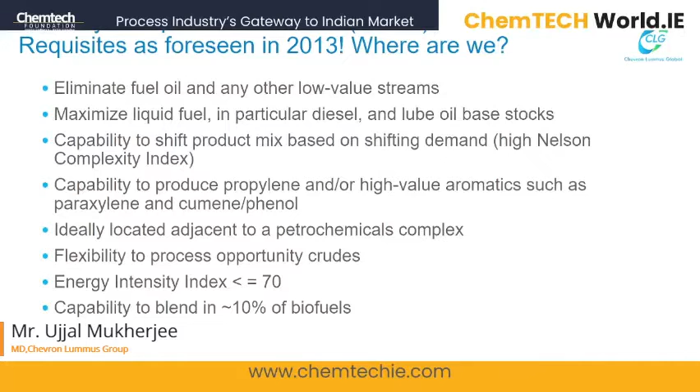And the energy intensity index of less than 70 still holds, along with the capability to blend about 10% biofuels. This was back in 2013.

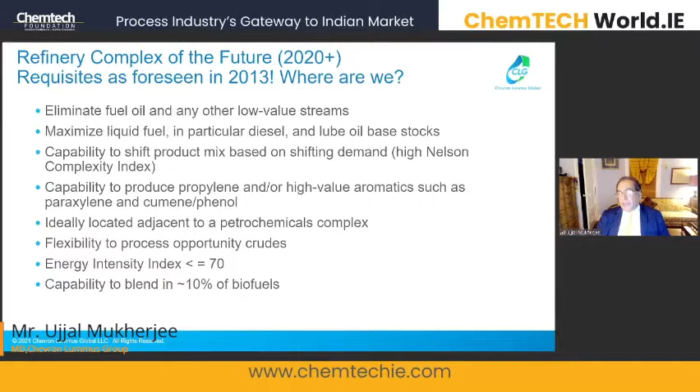So going forward, I wanted to look at what's going on around the world in terms of refining activity. Starting from the bottom, North America - there's nothing going on in refining other than keeping the refineries going. A lot of excess capacity is being shed. Many refineries, about 7 of them, shut down last year in 2020.

Some of the ones shut down are converting to renewables, especially people like PBF - they are converting. As for consolidation, you must have read the rumor - still a rumor, but who knows what's going on - that consolidation including people like Chevron and Exxon talking. So there's no restriction on the size of companies willing to consolidate, but that so far has been treated as a rumor.

Central and South America - Pemex is showing some signs of life. South America, other than Colombia, is pretty dead.

In Africa, there is activity—Nigeria, Ethiopia, Ghana, Kenya, West Africa—some activity, mostly in transportation fuels.

In Europe, the western side is very slow, including stopping existing projects that were announced in FEED and EPC. Some of them are being stopped.

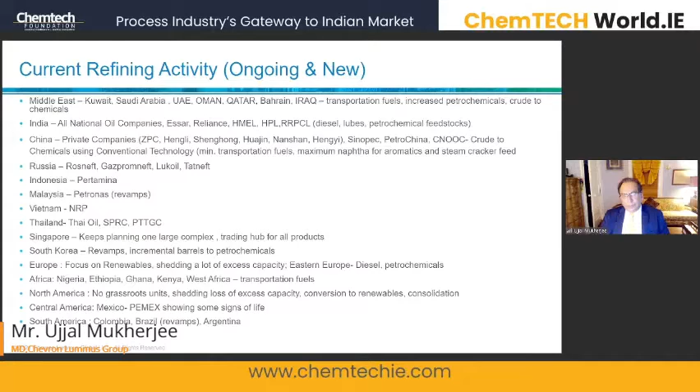So what is the current growth? What is driving the refineries? When we talk of the future, in the Middle East and India, it takes between 5 and 7 years to get to that place.

So when we talk of the future, we're not talking near-term—we're talking close to 2028, 2030.

So the number of residue upgrading projects is growing at about 3 times the rate of new refineries. Each of those projects requires hydrocracking. Migration to premium lubricants will continue, along with a persistent demand for delayed coking from Eastern Europe and Russia.

RDS, RFCC—some mega projects are being planned. And especially in the context that Mr. Singh highlighted, if there's a gasoline demand, then the RFCC still remains extremely attractive.

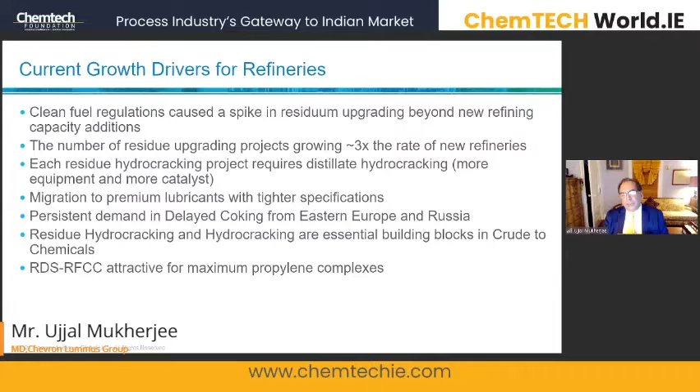What we have to do is get that net conversion from crude up. So that's part of the driving force for the RDS RFCC projects.

So major challenges—I checked this week, the VLSFO price is about $510, $508 a ton, whether it's Rotterdam or Singapore, there's a slight difference. And the delta between VLSFO and HSFO is about $200 a ton.

So a 400,000 barrel per day refinery is losing about $1 billion a year in opportunity cost if you're not doing anything with your fuel oil. And that's one of the major drivers wherever we see an RDS, RFCC, resid hydrocracking, or delayed coking project.

If you go to lighter, sweeter crudes, as some people are doing in Europe, to minimize the bottoms, then you're paying more for that crude.

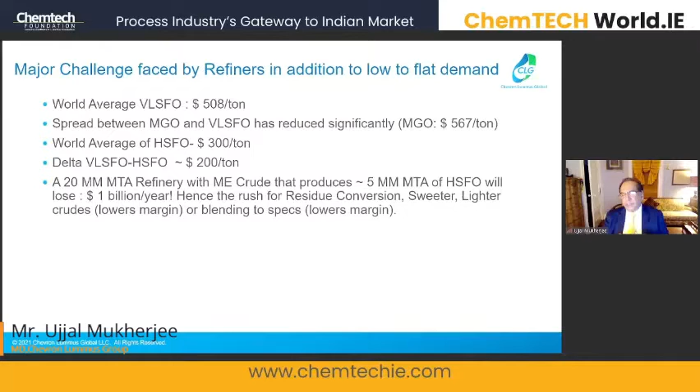So it's a huge opportunity cost if you're not doing anything, especially with the Middle Eastern crudes. And if you switch to a much lighter crude, that percentage drops, but it's still a loss—and that's one of the drivers.

So there are lots of techniques available to convert the resid - LC Max, LC LSFO, LC slurry. The slurry converts almost everything that is there. Yes, there are capex, but as companies in India are capable of building most of these equipment involved, we see the capex coming down.

Like I was really encouraged with NRL building a new LC fining unit. So if I took the cost of building that LC fining in, let's say, Portugal versus in Assam, there's a huge capex advantage of building in India, despite the lower, let's say, labor productivity. Just the absolute cost of building is less.

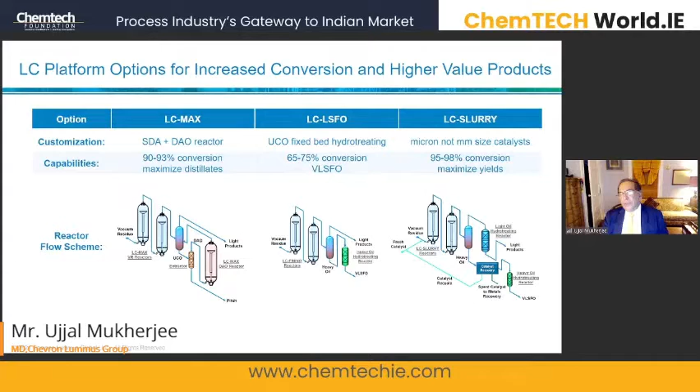So if you have to convert everything, these LC platforms give you a way.

This one has seen a lot of attraction where, taking advantage of the VLSFO price, we can do a partial conversion of resid and make very high quality VLSFO. What this does is it permits you to get a lot of the FCC slurry oil also converted, which is a challenge for many refiners. Something to think about.

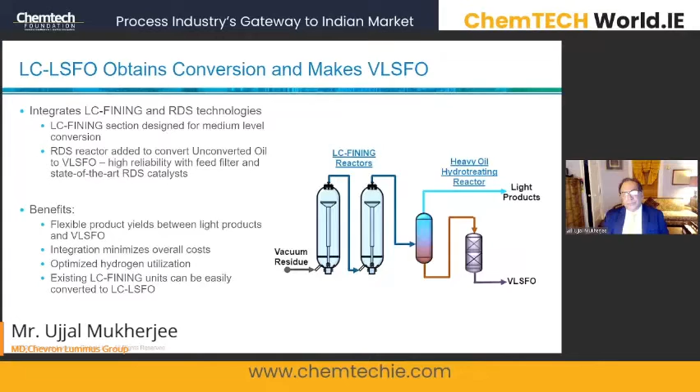And then the slurry - we are investing a lot, working closely with many people. This is a complete conversion of bottoms. It's a very unique catalyst system, which traps all the metals and carbon inside those pores. So if you go to a true zero residue solution, this is something to consider.

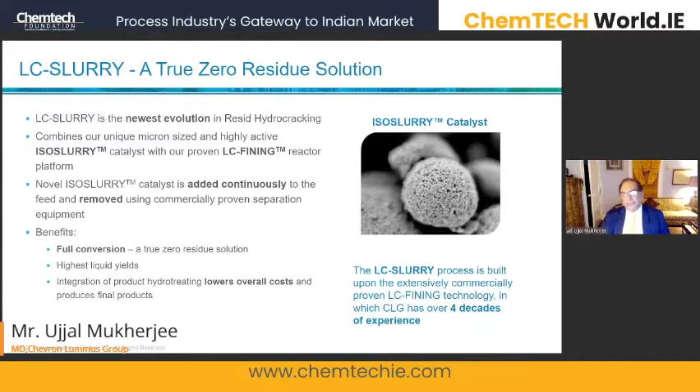So between coking, RDS, LC fining, LC Max, LC - I've just presented progressively as you go to the right, you get from every barrel of residue complete conversion.

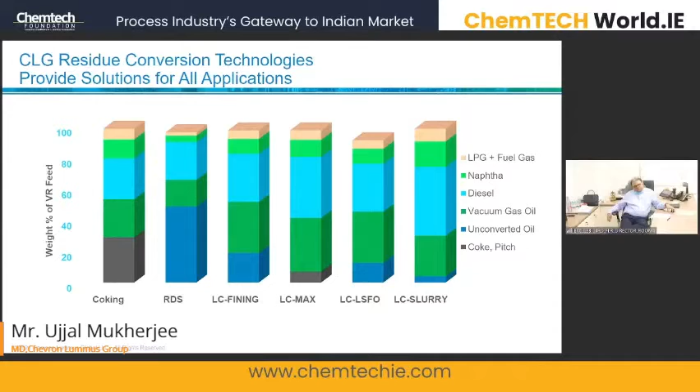Yes, there'll be hydrogen, because your vacuum resid has got low hydrogen, and as you go towards the right, especially if your slate is going more towards LPG and naphtha, there will be more hydrogen. What has happened is that the cost of natural gas is also trending lower as more and more supplies come on stream - from Qatar, Australia, India, but especially, of course, the LNG exports from the US. We see that the price of natural gas is trending lower, even in places where it traditionally was very high - South Korea, Japan, Northern China.

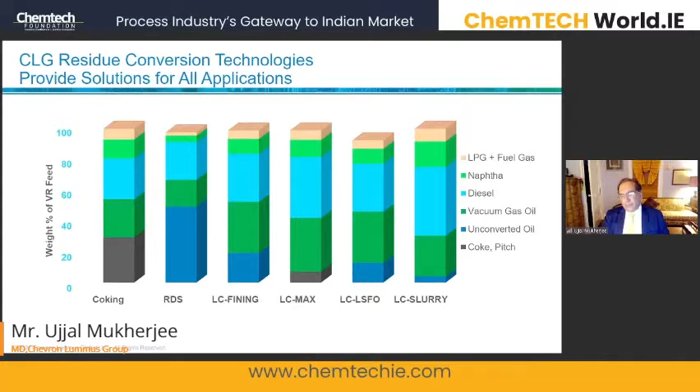These things start making sense as we secure the hydrogen. Yes, because if I take on the right-hand side, LPG, naphtha - they have a huge hydrogen content compared to the starting resid. So we have to secure the hydrogen.

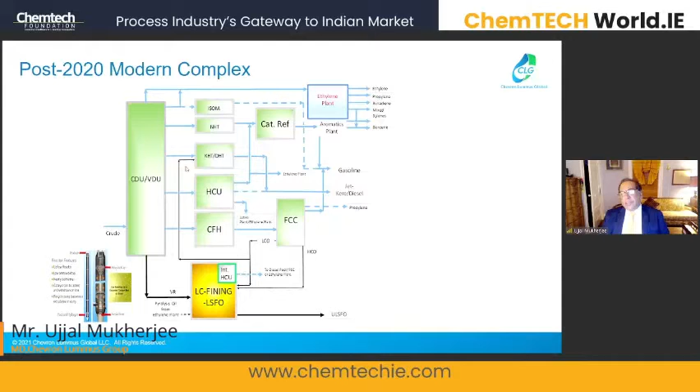So this is what a post-2020 complex would look like. You have the FCC, a cat feed hydrotreater, hydrocracker - because that's what is balancing between kerosene and gasoline. And you are taking your ROG, refinery off-gases, and other light naphtha to the cracker. And in the bottoms, you can make very low sulfur fuel oil and FCC feed. So this represents a pretty tight complex of today. This forms like a baseline from which to look at the future.

So the trends that we are seeing worldwide are in terms of dollars per ton. If I take the crude cost and put it on the same scale - yes, ethylene, propylene, ethylene from gas crackers, the price is much lower than propylene in the US, for example. But in other places, they are closer to each other. You've got paraxylene, then gasoline, diesel, and very low sulfur fuel oil. And then what is being pushed out are the heavy fuel oil and coke.

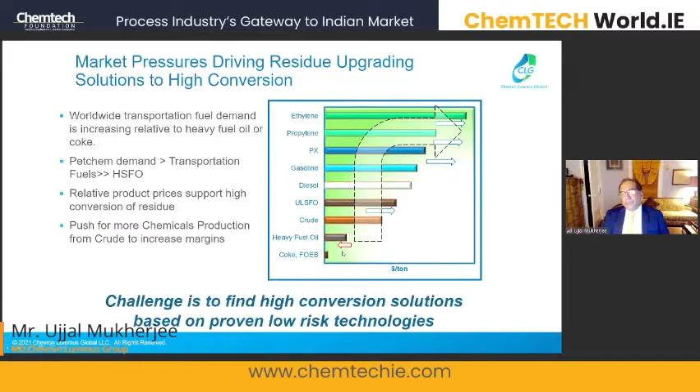So what are the disruptive forces that we are finding? Mr. Singh mentioned something about electric vehicles. Yes, the pandemic was a huge shock, but I think that's temporary.

Again, we'll bounce back. The shale gas in the US has brought down the cost of natural gas, and LNG is being exported from the US to the Far East.

So yes, the shale oil part of it is very strange because they turned it on, but last year, as you know, many companies went into bankruptcy as the oil prices fell. So, but the Middle East and OPEC are always paying very close attention to the number of rigs in operation in Texas and Oklahoma.

The one thing that is very fast growing and which will put tremendous pressure on infrastructure are, believe it or not, Bitcoins and data centers. I was amazed to learn that Bitcoins in 2019 consumed more power, 123 terawatt hours, which is more than the consumption of Pakistan as a country, just to mine those Bitcoins. Data centers, very fast growing throughout the US, Western Europe, India, I'm sure, are a huge consumer of power.

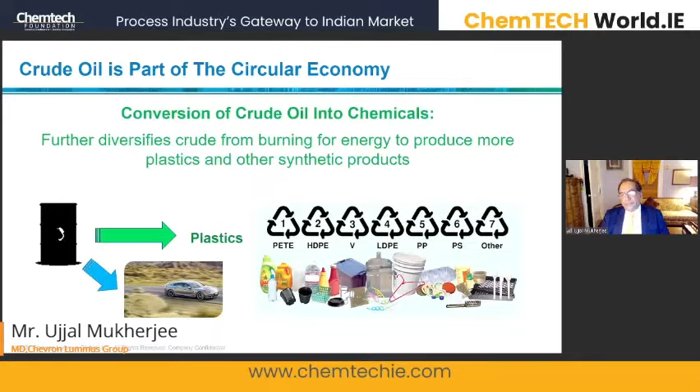So if I take what has gone on from 2020 and beyond, we are looking at 40 to 80% chemicals as a target. Right now, we are still much lower than even 40% in most refineries. It's still probably less than 15%, stuck there because of lack of investment. But if I look at a place like the new refineries that have come up in China, they're already in the 2020 and beyond range in terms of total amount of chemicals. So that's a good target to have.

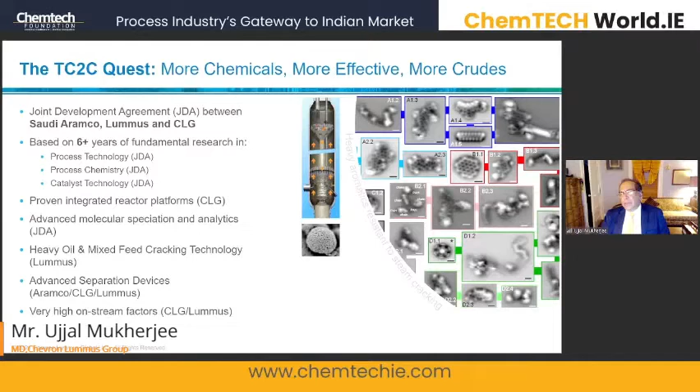Now, how do I reach that target? So about 6 years ago, Chevron, Lummus Global, and Aramco embarked on a very intense program to convert all the molecules, at a molecular level, that exist back to petrochemicals with the minimum amount of capital and minimum amount of energy. So the target was at least 70% chemicals, and it had to be at least 40% cheaper than typical crude oil to chemical routing using the conventional route.

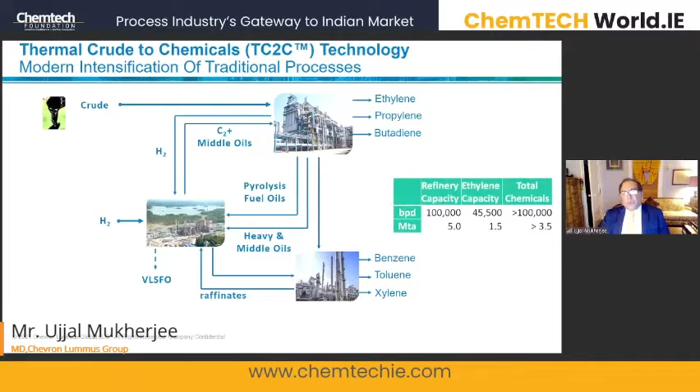So what it does is it takes the crude, and we tested it on Arab Extra Light, Arab Light, and Arab Medium. The intense program was first tried out on Arab Light and Arab Extra Light. There's no crude vacuum distillation. Some of the crude is taken to a special separation device. Part of it is sent directly to the mixed feed cracker, and anything that is heavy is hydroprocessed, not to naphtha or LPG, but just enough so that the cracker can accept it without contaminants and with the right amount of hydrogen. You can trap aromatics from the system if you have a need for aromatics, or you can just have the mixed feed cracker embedded with what we call crude conditioning. So it's a very compact system.

The first one was commercialized in a refinery in Asia, and there are at least 2 planned in the next couple of years, including one potentially in India.

So you can bring in the crude. You don't have to have crude vacuum distillation. You need some fixed bed hydroprocessing, and if the crude is heavy, you need a little bit of an ebullated bed reactor or a slurry reactor to convert it back to the fixed bed system. But these are not complete units. These are portions of proven technologies fitted together so you only take the equipment that is an absolute necessity to convert a particular molecule. You never have the entire fractionation and separation systems, because those are common.

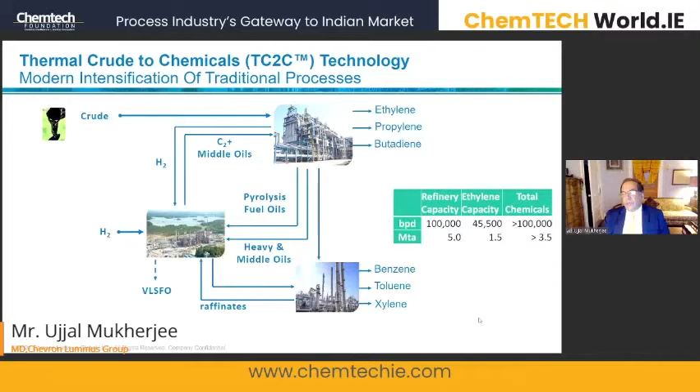So what are we looking at? For a 1500 KTA ethylene plant, we are looking at about 100,000 barrels per day of Arab Light crude. That's pretty efficient, and along with that ethylene you get propylene, butadiene, aromatics. So if the intent is to make chemicals from crude, this is a very good way. We are looking at between 70 and 80% chemicals from crude.

And why is it attractive? Because when we make petrochemicals, we always look at the ethylene cost curve - how much does it cost to make ethylene based on a particular feedstock. If I look at the spread between naphtha and crude, it keeps rising, from $150, $100 roughly, to over $160 by the time after 2030.

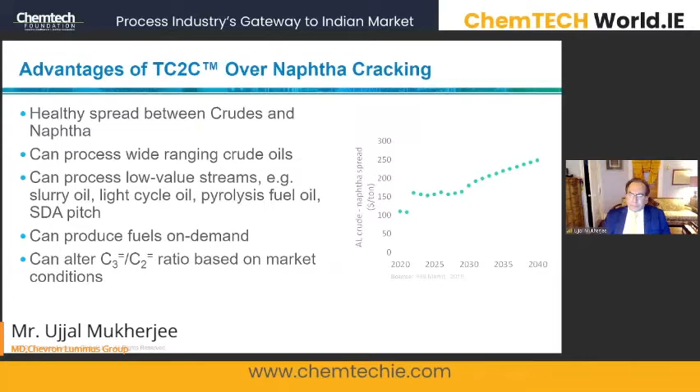The other thing that can happen is you can take all the low value streams - pyrolysis fuel oil from your mixed feed cracker, or slurry oil from your FCC unit, or pitch - and vary the ethylene to propylene ratio. So once you start processing crude, be it Arab Extra Light, Arab Light, or Permian, you get a tremendous amount of flexibility. The other thing that is always there is with this system you can always make diesel or gasoline on demand. So you don't have to convert everything to chemicals, but it gives you the ability to make very high quality diesel, very low sulfur fuel oil, or gasoline on demand.

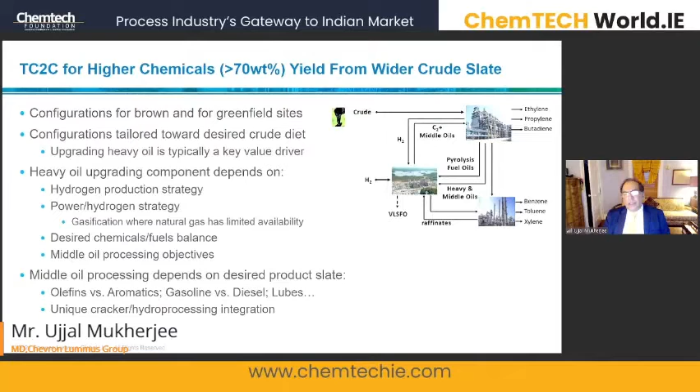So this is truly disruptive, as I said - 30 to 40% less capex and 70 to 80% chemicals from most crude. And it can be a plug-on. If you have existing refineries like BPCL, Reliance, Essar, you can just take a portion of the crude and convert that to chemicals, while, as Mr. Singh mentioned, there is the belly that is less valuable. There's no reason you can't take some of that belly and convert it into chemicals very readily, because that belly is already lighter than the whole crude. Or you take some of your crude and convert that to chemicals while the rest of the refinery is focused on making more gasoline.

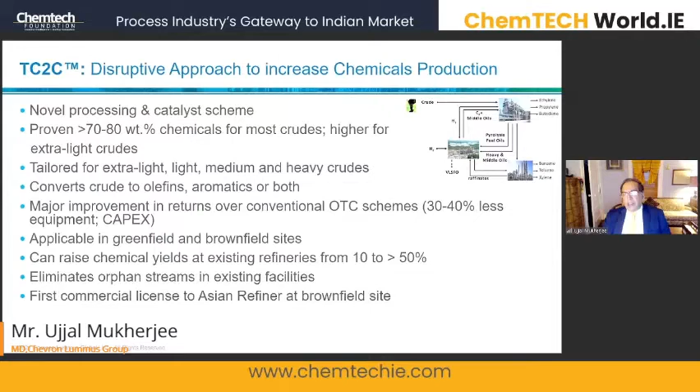So there are some very interesting solutions called bolt-on solutions, which especially the Kingdom of Saudi Arabia is looking at, where they have excess diesel or in certain instances they don't want jet, they don't want diesel, they want more of the chemicals. This is one way to do it.

So the IMO 2020 was a big driver. We've addressed it with many technologies - innovative solutions, crude to chemicals, expanding conventional technology. India still doesn't have an RDS unit; other places do. Whenever you have an RFCC, that's a very good option. And sustainable technologies - as we go around the world, even in places like Indonesia, China, Thailand, they're looking at some amount of biofuels into the feed.

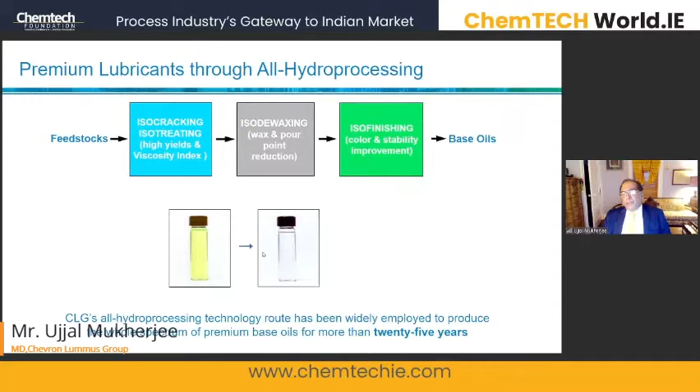Premium lubricants and white oils - both are low-hanging fruit available to refiners, and this market is pretty robust. India still imports a lot of lube oils, something to consider. BPCL, of course, is a big producer, but for most refiners this is a very quick, low-cost way of getting some real benefits from every barrel of unconverted oil.

Biofuels - lots of things going on in the US and other places. Now, biofuels have some big challenges, in the sense that if I take non-edible plants, the amount of acreage per barrel of biofuel is enormous. It doesn't become sustainable. So we always look at what else is there - waste oils, or ideally, if I can consume waste plastics and biofuels together, it starts making sense in terms of scale.

So we commercialized one of the units in Japan with different types of feeds, but certainly diesel, jet fuel, naphtha. There are planes that have flown with our ReadiJet and ReadiDiesel. These technologies are already available. Some of them are without the use of hydrogen, using supercritical water. So something to look at.

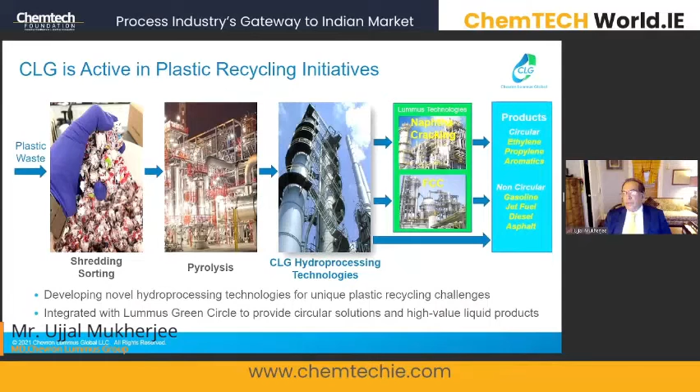Plastic recycling: we started a new venture in Texas with a company called New Hope, where we take plastic waste, different kinds of plastics. If I had only polypropylene or polyethylene, life becomes very easy because those are easiest to convert back to petrochemical feedstocks. But sometimes you get nylons, things that have different structures, lots and lots of chlorine.

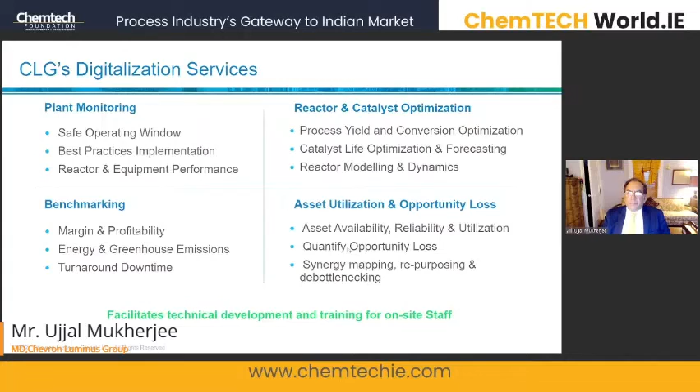So we call these the centers of excellence. The first one started up in Bahrain. We are starting up another one in Jubail. And this will train young and experienced operators in all aspects, from normal operations to fundamentals to how to deal with emergency situations.

The other thing we are working on, extremely important for the refinery of the future - we used to have these 3D models. Now these are live 3D models where you're walking through complex plants, be it LC fining or a cracker. This is by far one of the best ways to teach new staff where the valves are, are they accessible, where are the emergency systems, how do I get to them, is the access good, where will the trucks come in - all those things. Using these digital platforms, we are working with a company called Explain Media to develop this for some of our complex portfolios.